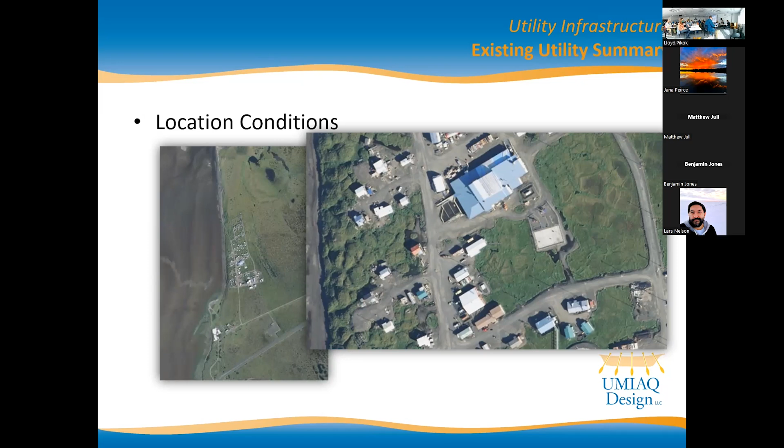So this is Point Lay for those who haven't really seen it. It's a little more expansive view on the left side. You can kind of see where the drained lake is that Billy alluded to earlier. The whole reason I wanted to include this here is Point Lay again shows all the different signs of permafrost. We've got the high centered polygons here. We've got more low centered polygons here. We're kind of chasing all the conditions across the community. And then again, we've got known ponds that have been forming for a number of years and continue to grow dramatically.

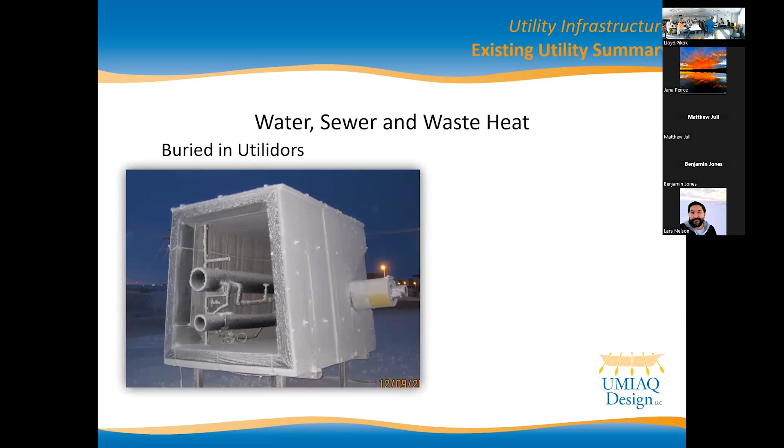For those who haven't seen it yet, or going to see it tomorrow or Monday night, this is what the utilidor system looks like. There used to be an old mock-up near the A block that was discussed earlier, where you could actually go see this and not have to get into the actual utilidor structure itself. And then the direct bury systems, this is really what those look like. We're putting Arctic pipe in the ground. If you're not familiar with the Arctic pipe, we've got our core pipe, HDPE, and then we've got an insulated layer with a jacket to protect the whole system.

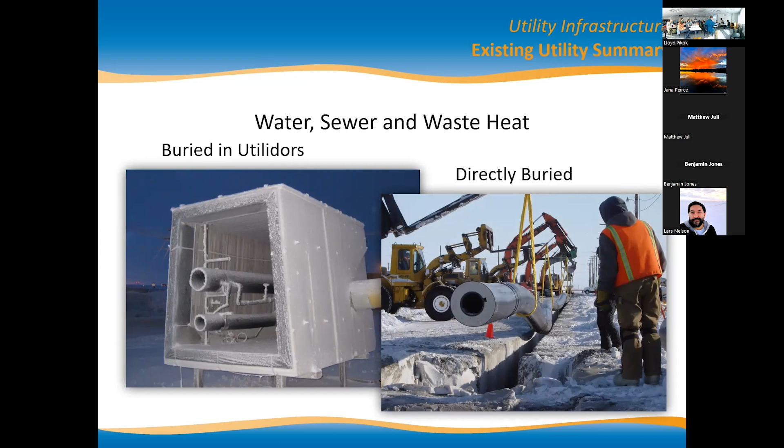So current conditions, this is kind of a mix. We've got a lot of settlement issues. We've got settlement next to buildings. We've got settlement in the streets. They're all tied to larger excavations. We'll go into that here in a little bit, but it's creating issues that we have to have a lot of construction effort and expense put to maintain our systems.

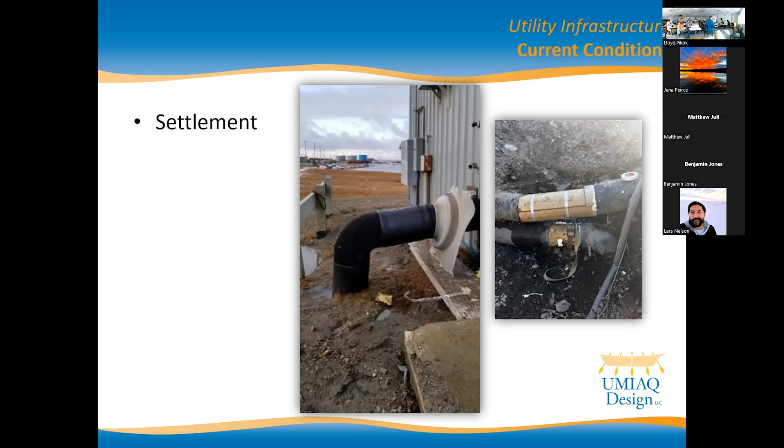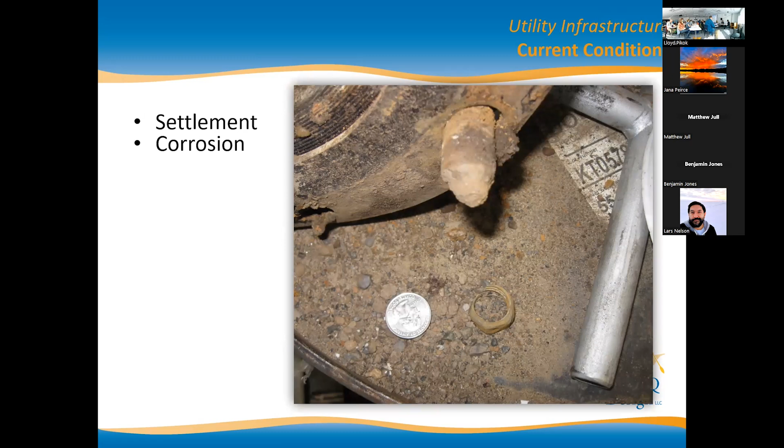One thing that the engineers didn't plan for very well early on was corrosion. Even though we're going to keep a thawed system right next to our flanges and bolts underground, and after 10 years, we're seeing quite a bit of material loss, and Barrow's got a lot of unmet need in that regard.

Water leaks, that's what gets everyone's attention. We start losing water out of our limited water supply. We have fill and draw systems. We pump water annually, store it for winter use, and then the next year we go to make more. So every time we have a water leak like this, it gets everyone's attention real fast because it puts pressure on the water supply, and there's a risk of running out.

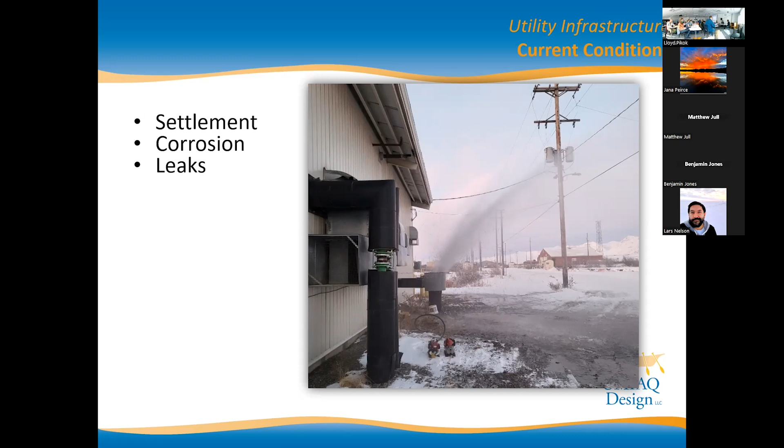The water leaks also create hidden damage. We have 60 psi water, and the spray foam that's in the pipe is rated about 35 psi. And when we have an underground water leak, we get the insulation crushed, and that creates a problem for our operations for risking freeze up underground.

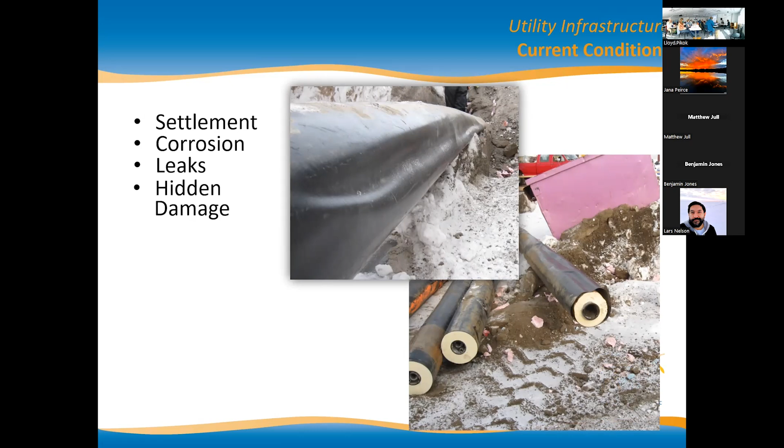This is one of these Arctic pipes here, and this wrinkle is a place where, just like this, we've lost insulation thickness. So this is maybe an inch of depression in the Arctic pipe wall. Just like this picture here, we've lost about an inch around here, and then the jacketing is kind of folded up, so it looks like it's wider on that side.

And this is kind of a bigger one with more wide-ranging issues, inflow and infiltration into the collection systems. It's a problem at our wastewater plants because it taxes our ability to process wastewater during the May, June months and stretching into July. But more to the point, it also shows that when the water and sewer systems were installed, the trenches that they put the pipe in are more permeable than the original permafrost, creating a groundwater channel that surface waters can flow through, meaning that now at the bottom of our trenches that are 10 to 14 feet deep, we have thawed conditions in May.

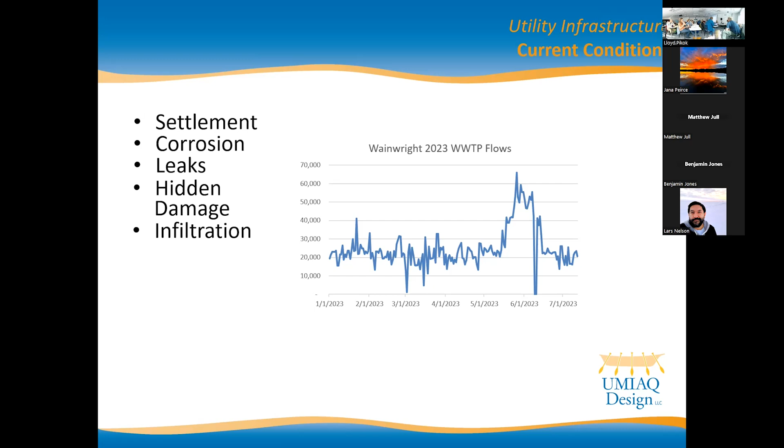All right, so something that I've talked about earlier is settlement in our systems. A big component of this is areas where we have large excavations, such as a manhole. We'd have a place where a person can get into the ground and work next to the manhole to connect pipe. Problem is that creates a condition that now we can have excess settlement in that area around the manhole.

A part of the problem there is using frozen soils for backfill. We get about 65% compaction on those soils. So after the first thaw season, we start seeing consolidation of those areas and the pipes descend through the trench.

Similarly, we might see something in the field on the pipe where a service connection or a clean out exists, and we'll have the same condition.

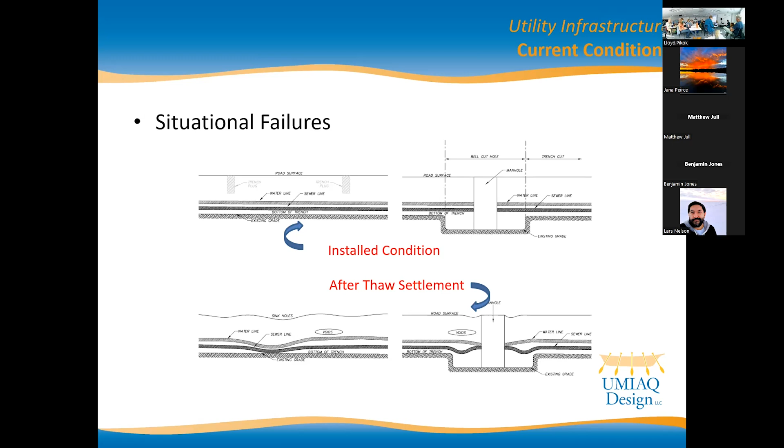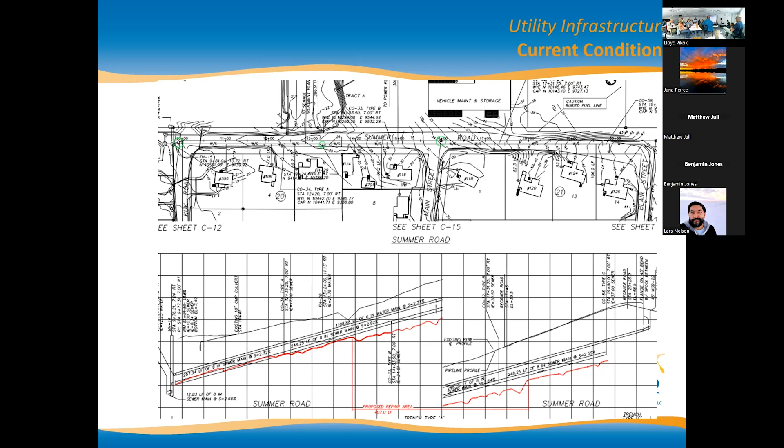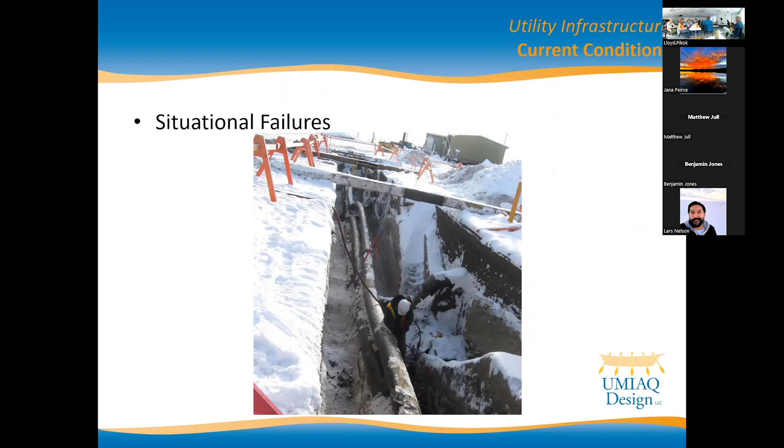And I guess this picture doesn't show very well, but this is the same street. And this stretch right here, over 50 feet, we had a 5-foot deflection.

So what the borough's done over the years to address some of these issues, we've had some programmed responses. This is Point Lay. We went to more of a shallow bury installation, keeping the utilities as much in the road prism as possible, trying to keep it out of the permafrost. And that's been mostly successful. The main places we've had issues are where we've had a service tee go off and it would tie into an original deeper service. And that's where our weak link has moved.

We've had more repairs, and as talked about with Ives earlier, using spray foam. That's done a few things for us. It gives us a water barrier, acts as a trench plug, gives us a larger footing and more insulation value for the permafrost in that area. We did do some tests early on when we first started doing this, and we're getting about 90%, 97% recovery of the insulation that the manufacturer is expecting when we use this product.

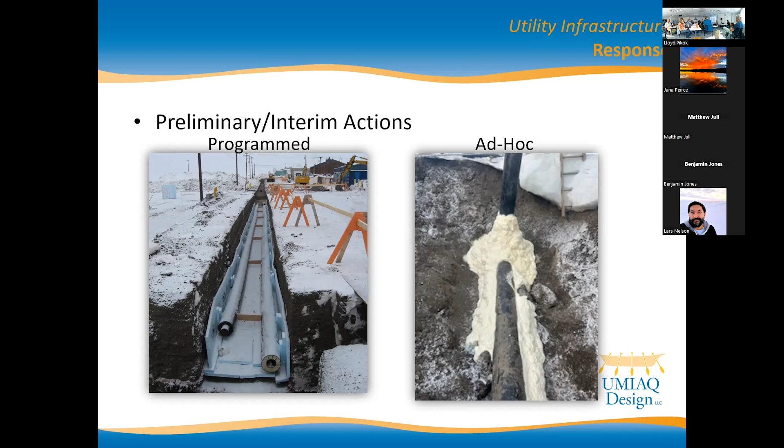All right, so we're kind of moving into interim, possibly long-term solutions. Right now, Point Lay's got every home except for one now has a holding tank, and all the commercial industrial facilities are still on the pipe system. So there's not much demand left on the piped collection system at this point in time.

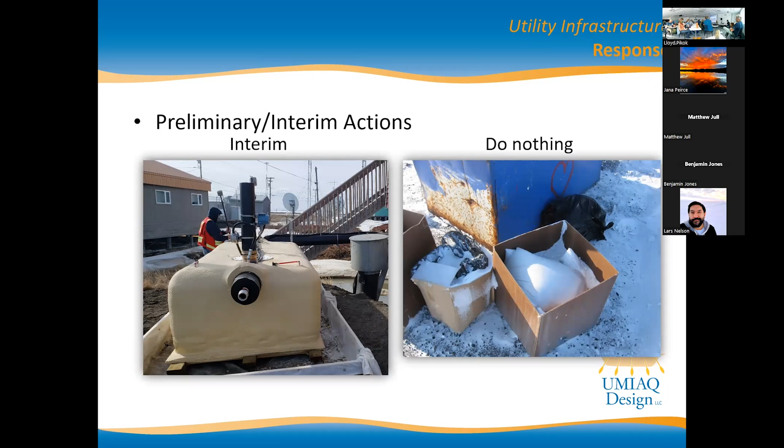But the borough's still having to invest a lot of capital to make this happen, because the other alternatives, we go way back and we go back to honey bucket service, which doesn't do anyone any benefits for health, and no one wants to see that.

Okay, so going forward, this is kind of what we're looking at for revisioning Point Lay, new above grade water and sewer systems. Still a circulating water main, so still a single loop, much like what they have currently. The sewer collection system is proposed as a vacuum system. There'll be a couple sub loops, one here, and then there'll be a smaller one for the industrial area.

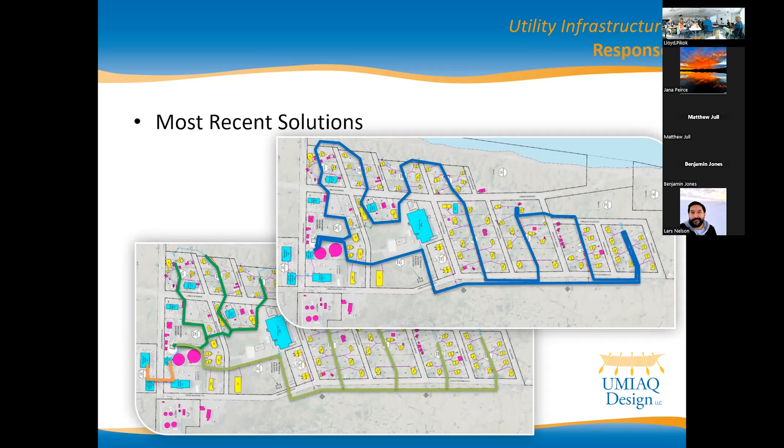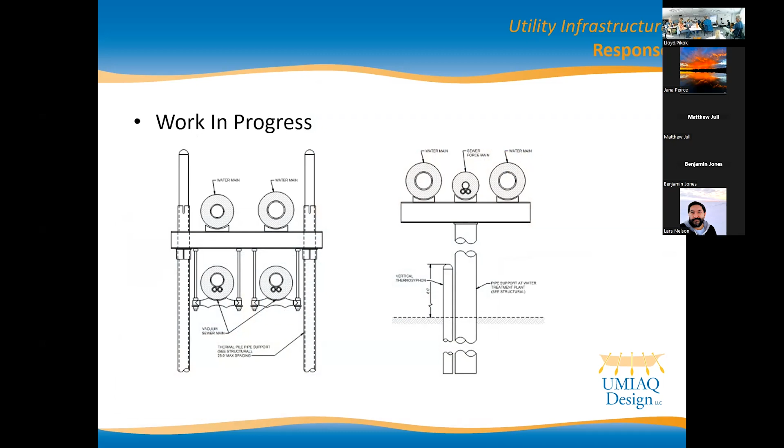One challenge, and we'll highlight this here and on the next slide as well, is road crossings. We do have a number of road crossings that we're going to need to make through the town. We don't like the idea of going buried through the road, but we're not seeing a whole lot of options at this point in time. So those are having to be reinforced, heavily insulated, protected thermally with the thermosyphons, just to keep those areas stabilized.

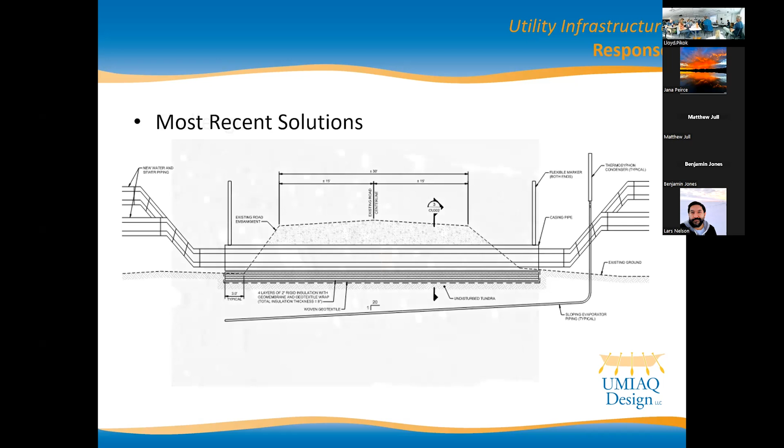And there's more challenges related to that here. So we need to do these not just on road crossings, which might be Main Street or back street, but we have to do these on the east-west road crossings as well, because of their snow push areas that we need to make sure Public Works still has their access through to service the community.

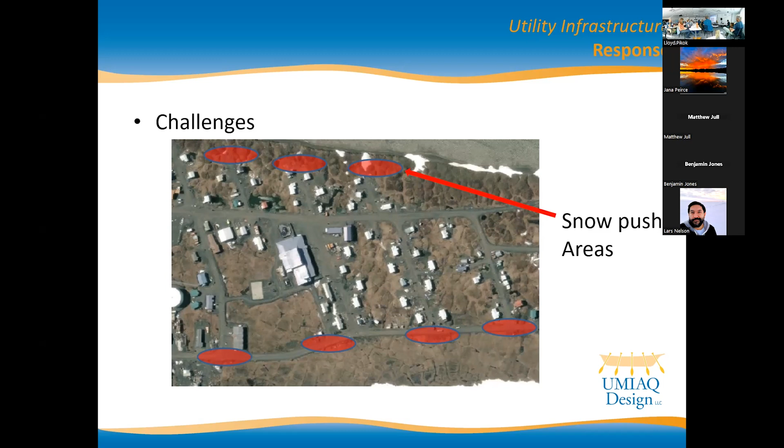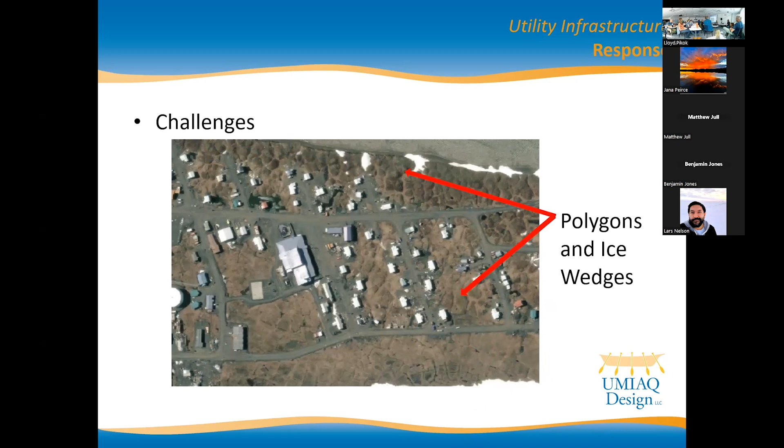The other challenge is setting piling for these new service mains. We have to either dictate where these locations are going to be for a contractor so that we can avoid these ice wedges that have been talked about, or we're going to have the piling go down to below sea level effectively to keep stability. All right, so that's kind of where we are with those systems.